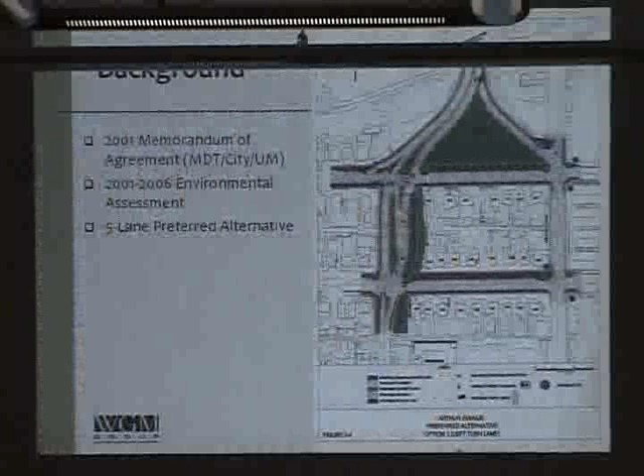There was an environmental assessment—the 5th, 6th, and Arthur EA—prepared over a period of 5 or 6 years. A 5-lane alternative was identified as the preferred alternative. It looked something like this. This is a graphic from one of those documents, and you can see there was a real emphasis on widening Arthur.

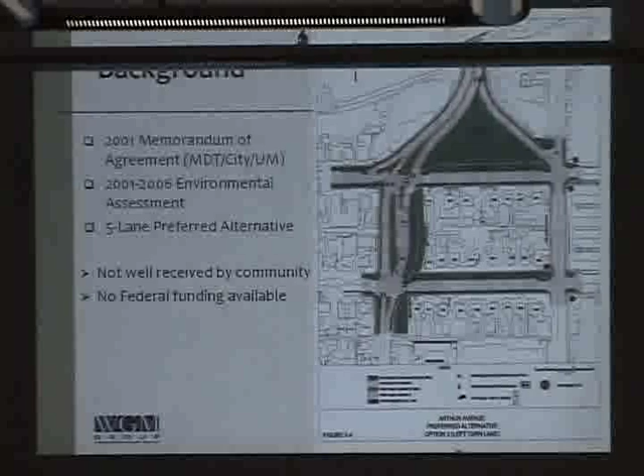This project, as it was proposed in that EA, didn't have a lot of community support, and there was no federal funding available for it. So ultimately, the no-build decision was arrived at for that project.

However, the need for the project didn't go away just by saying we're not going to build this one. The need continued to persist. The university felt it probably most keenly because it's right here at one of their primary entrances. And they approached the city as well as WGM Group and said, is there something we can do in the interim—not this full project that doesn't have support and can't be funded—something else that would address the safety concerns, maybe without totally addressing the traffic analysis, the traffic volumes of a 20-year projection, which is what the previous project tried to do.

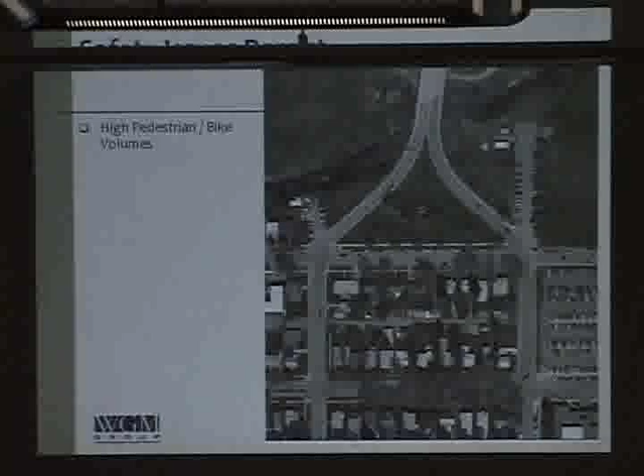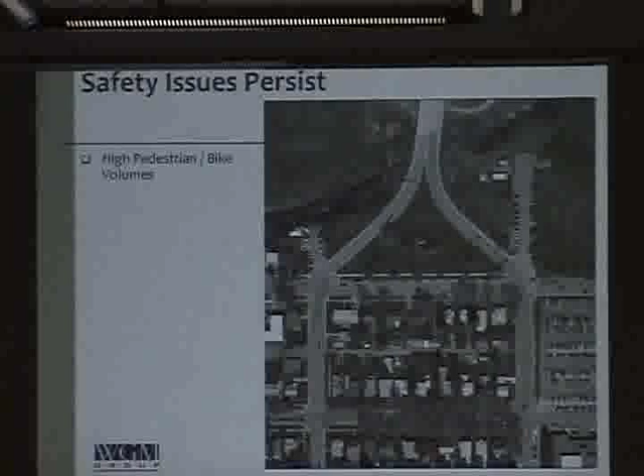Some of those issues that we needed to address included high pedestrian and bicycle volumes. There's probably more mixed modes of use at this intersection than there is anywhere else in the city of Missoula. Not at this intersection, but within these 4 intersections, this project area, than anywhere else in the city of Missoula, possibly anywhere else in the state of Montana, between cars, buses, trucks, bicycles, and pedestrians, and the volumes of each.

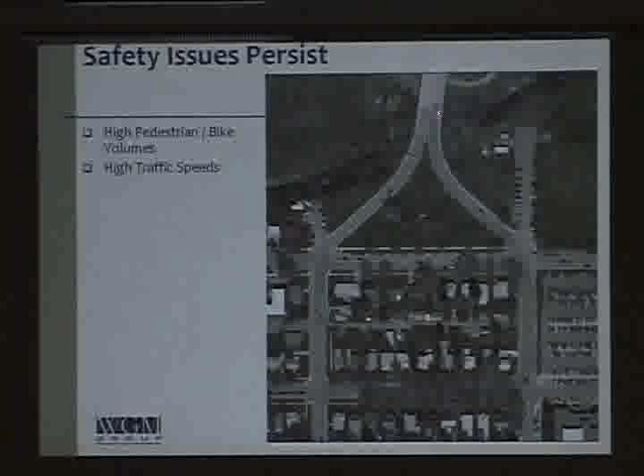Also, high traffic speeds were a concern, primarily coming down this leg of Madison. Poor levels of service at some movements at some of the intersections, primarily over at 5th and Maurice. It's a classic intersection problem. There was also a lot of crashes in the area.

90 crashes were recorded in the project area during the time frame that I did a crash analysis of, which was from July of 2002 through the end of 2008. There were 90 recorded crashes, ranging from minor fender benders to one actual pedestrian fatality that occurred over in the vicinity of 6th and Maurice.

There were, at the intersection of 5th and Maurice, 26 crashes that included 12 vehicles that were struck after leaving the westbound stop sign. So as you know, if you drive this in the afternoon, there's a lot of delay at this intersection, and folks, when they finally got their opportunity at the stop sign, are accepting gaps that maybe are a little bit less than they ought to be, being a little too aggressive, resulting in crashes of westbound vehicles being struck by northbound Maurice Avenue traffic.

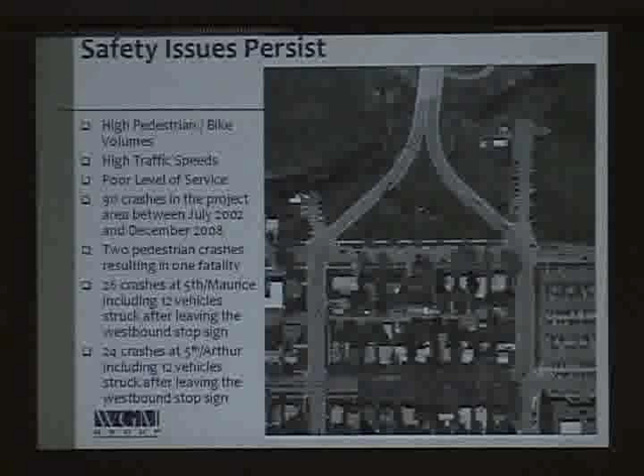And then also 24 crashes over here at 5th and Arthur. Again, 12 of those being vehicles that left the stop sign, entered the intersection, and then were struck by traffic coming down Madison off of the bridge. So these were some of the safety issues, and then just the sheer volume of Highway 12 traffic passing immediately adjacent to the university campus was also something of a concern to the university.

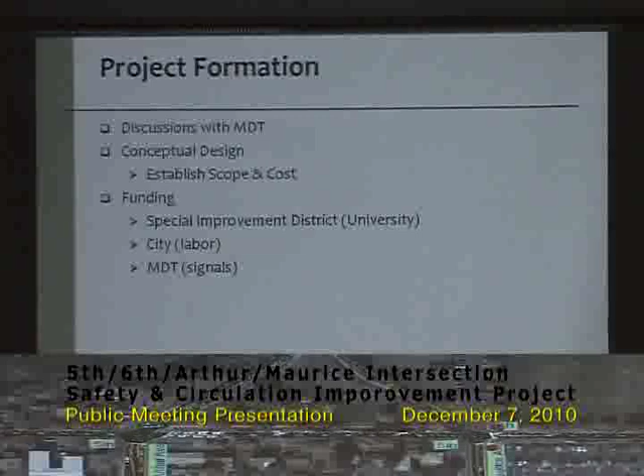The current project started, as I mentioned, with the university wanting to see something still done. We had discussions with MDT. MDT owns the right-of-way of Highway 12. US Highway 12 is a federal route and it goes right through this study area.

So MDT is a key partner in this. They have been involved since the beginning, first with the 5th, 6th Arthur project, and now with this current project. We put together a conceptual design, provided that to MDT, got feedback. We're in the process of responding to that feedback. And Greg mentioned earlier on, the funding for the construction is primarily going to be through an SID on the university, as well as the city providing labor for some of the construction where they have that expertise available, and MDT is going to be contributing a significant amount of the equipment for the traffic signals.

The project purpose, simply stated, is to address basic safety issues associated with a high volume of pedestrians, bikes, and motor vehicles entering the University of Montana campus and passing through on US Highway 12.

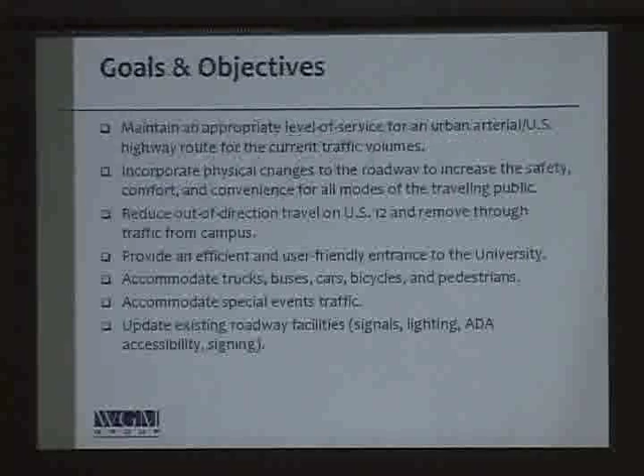The goals and objectives, I'll just move through these quickly. I'm not going to read all of them. A couple of the key ones, however, are to maintain an appropriate level of service for an urban arterial highway route for the current traffic volumes. And that word current is key here. I want to emphasize again, this is not a capacity improvement project. This is to address safety concerns, bicycle and pedestrian connectivity concerns, but not 20-year traffic volume forecasts.

So when we did our traffic analysis, we looked at current traffic volumes. We're going to incorporate physical changes to the roadway to increase the safety, comfort, and convenience of all modes of the traveling public. When we say all modes, we're focusing there on bicycles and pedestrians.

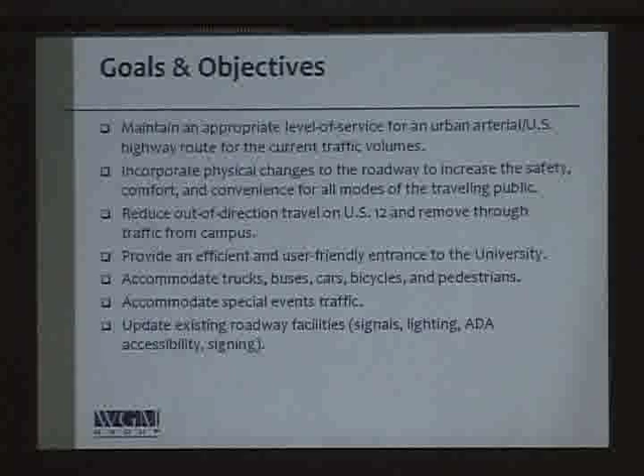As well as automobiles, but automobiles are already pretty well accommodated out here. The goal is to reduce out-of-direction travel on US 12 and remove through traffic from the campus. Because you have to go around on 6th and then up Maurice to get onto Madison and cross the bridge, you're driving further out of your way, producing more emissions, using more gas and more time. With the improvements being proposed here, all of those things can be reduced. I'll leave the other items for you to read, or you can look them up on the website if you want to study them.

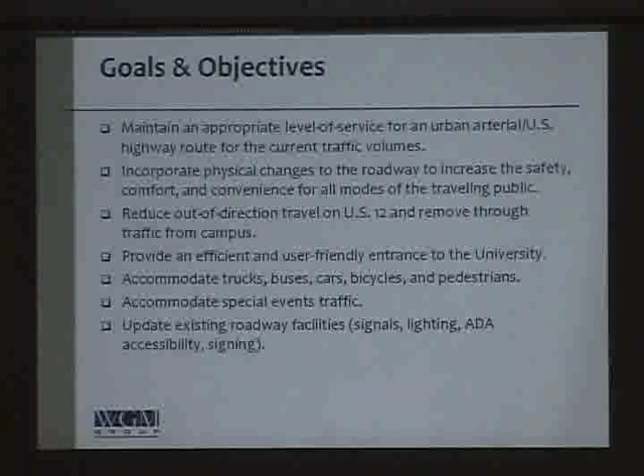So we did a preliminary traffic analysis. This was to satisfy the city that what we're looking at won't result in a lot of congestion, and to satisfy MDT that what we're proposing is acceptable on a US highway route. Let's not forget, this is US Highway 12 — I'm going to keep saying that because it's not an insignificant factor in everything we do here.

In the analysis, we did traffic counts back in the spring when the university was in session, did manual traffic counts at each of the intersections, and analyzed those. Part of what you saw earlier while waiting for the presentation to begin, the simulation on the screen, was part of that analysis. For those interested, once the presentation and Q&A are done, we'll put that simulation back up, and if you have questions about it, just seek me out and I'll be happy to talk to you about those.

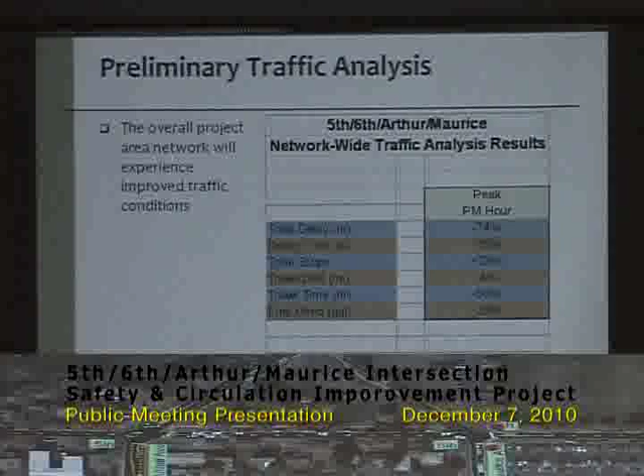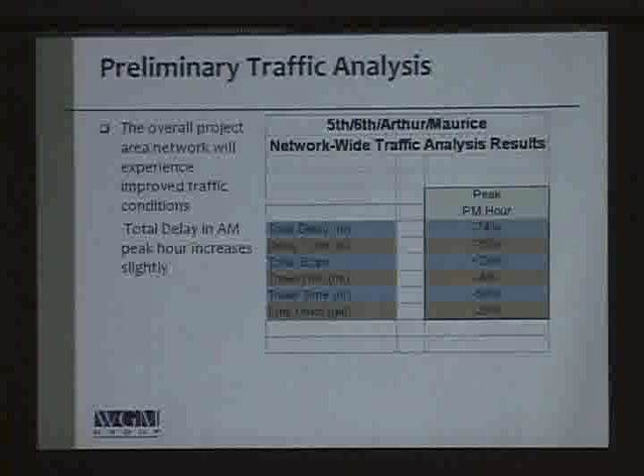We did some capacity analysis, a network-wide measure of effectiveness evaluation, and found that the overall project area network will experience improved traffic conditions. Total delay in the AM peak hour actually increases slightly because of the new traffic signal and reconfiguration, but total delay in the PM peak hour decreases substantially. You can see the numbers on the right-hand side — total delay and delay per vehicle reductions in the neighborhood of 75%, and fuel consumption reduction in the neighborhood of 30%. So while there's some inconvenience introduced in the AM peak hour, it's far more than offset by the improvements realized in the PM peak hour.

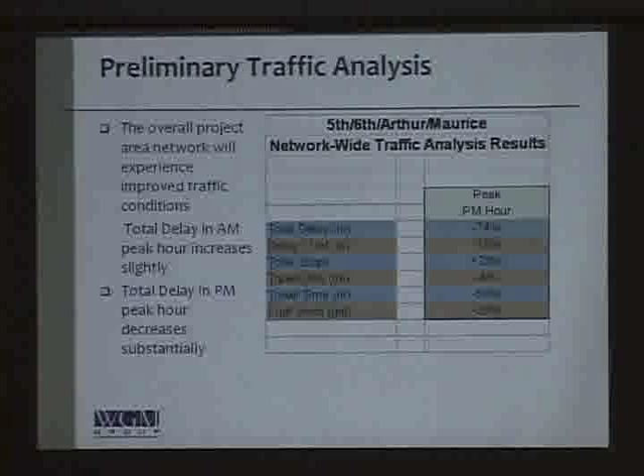So enough about the traffic analysis. Let's talk about what you came here to find out tonight, and that is just what is being proposed.

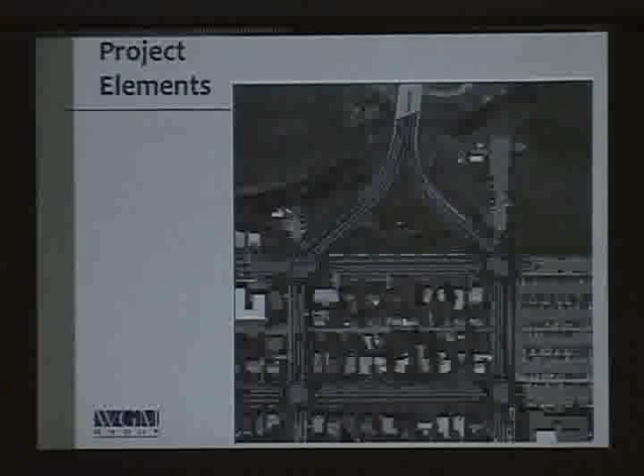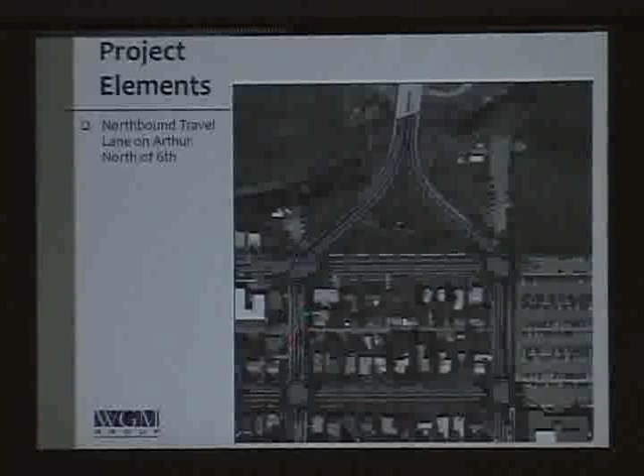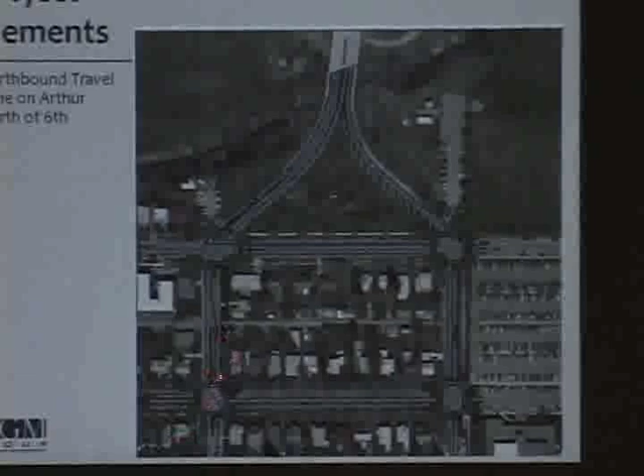The biggest difference, which Greg touched on earlier, the key thing we're doing that allows us to make improvements at other locations within the project area, is adding a northbound travel lane on Arthur Avenue. Currently if you come up Arthur to 6th Street, your only option is to turn right. We're going to add a through lane northbound on Arthur, working primarily within the existing curbs — one of the key differences between this project and the earlier one is that we're trying, to the greatest extent possible, to work on the existing pavement. On Arthur Avenue we're able to do that, with the exception of a quarter of a block right here, the east side, the south half of the block. Because of truck turning through here, we needed to widen a bit to provide a truck turning apron, which we'll see in more detail later.

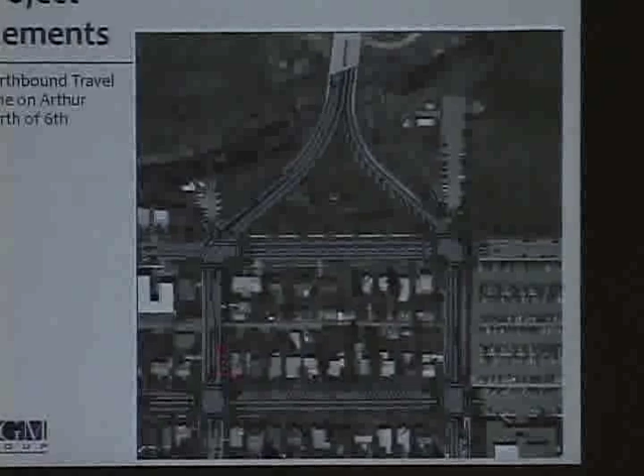Once you head north up Arthur and reach 6th Street, you can continue on what is a new lane, new asphalt, and widening — just to be clear about that — along this side of Jeanette Rankin Park. So we still have the two lanes southbound coming down, and now one added northbound lane in addition. That's the primary, biggest difference you're going to see out here.

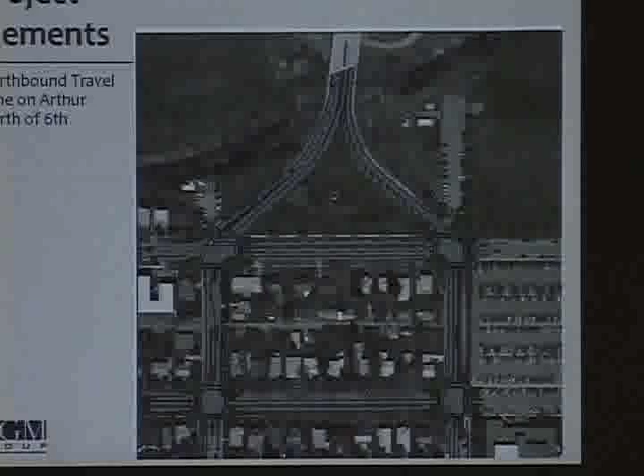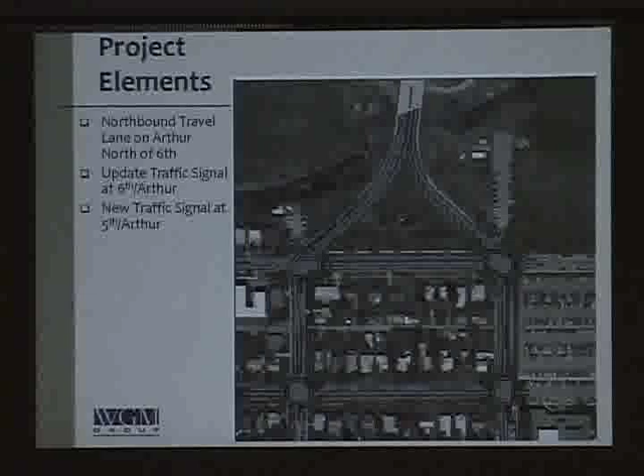We're going to update the traffic signal at 6th and Arthur with new vehicle detection and pedestrian detection, and put in a new traffic signal at 5th and Arthur. There will be intersection improvements at all 4 intersections, improved bike routing and sidewalk improvements, and finally updated pavement markings and signs throughout the project area.

I'm going to go through each of the 4 intersections here, trying to move through those as quickly as we can. We're going to talk about existing conditions and then what we're proposing to change.

Let me go back one. I'm going to go through these intersections in this order just to orient everyone. North is up on this figure. We're going to start here at 6th and Arthur, go to 5th and Arthur, then talk about this area up in here a little bit. Then we're going to come down to 6th and Maurice, and then finally talk about 5th and Maurice.

So at 6th and Arthur, the existing conditions that we felt really needed to be addressed, either because we were aware of them or because folks from the public we've already talked to brought them to our attention as key considerations, included long pedestrian crossing distances across the intersection.

There's no crosswalk, and in fact the prohibition of pedestrian crossings here, because of the way this signal currently operates there's always traffic heading in this direction, whether from the left, the right, or this through movement, so there's never an opportunity for pedestrians to cross here. That will change. The bike lane northbound on Arthur currently ends at this intersection.

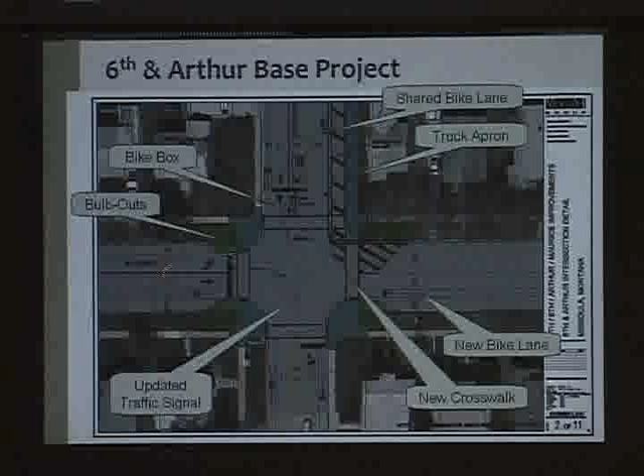There's a truck apron here on this side. We talked a little bit earlier about that widening in here so that this left turn can be made by larger vehicles.

And there's a single lane entry with the option for 2 lanes during events. One thing we have to bear in mind is that there's a lot of traffic entering the university, whether for sporting events, concerts, etc., and there are times when the university wants the flexibility to allow 2 lanes of traffic entering. During those times, part of the reason this is striped rather than a concrete bulb out is to allow through traffic from this lane. This parking would be removed during that period, signed in advance, and you would have 2 through lanes of traffic moving eastbound on 6th Street on occasion.

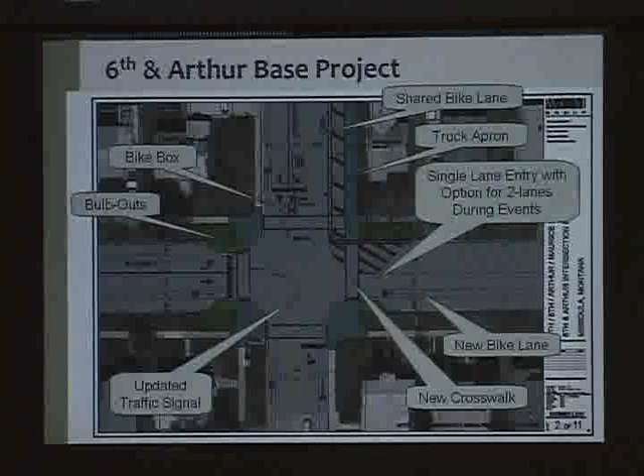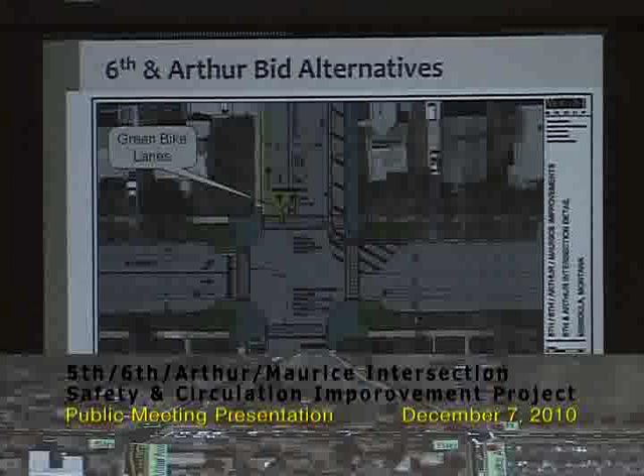So that's what we're going to do with this project. If budget allows, when the bids are received and if there's enough money left over, a couple of things that we'd like to add would be some green pavement markings, presuming that the city and the state can agree that that's something that they're willing to see out there and maintain. That would be an advantage, particularly in the bike box, would help it to really stand out.

As well as special crosswalk treatments. Those might be stamped colored asphalt, or they might be concrete crosswalks, depending on kind of where the preference lies. The intersection of 5th and Arthur, again with the existing conditions.

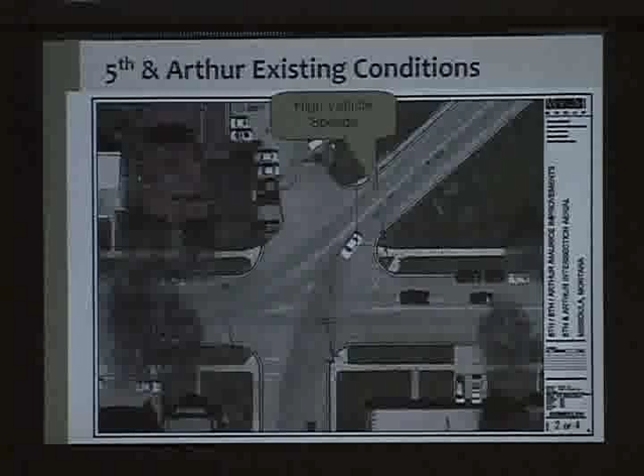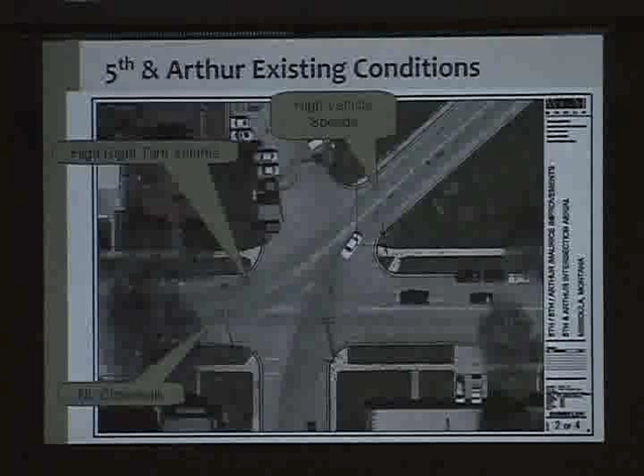Things we were made aware of were the high vehicle speeds coming down Madison. The high right turn volume, which is that Highway 12 traffic volume, and the fact that there's no crosswalk there. There's no crosswalk because it's simply not safe for pedestrians to cross there with the high volume of traffic coming down off of Madison, at least during peak times of the day. There's also no crosswalk on the north leg. Events traffic exiting the University of Montana is something we also need to continue to bear in mind.

So what are we proposing? A new traffic signal. Because this traffic here coming northbound on Arthur didn't used to be there, and all the other traffic that always has been there will continue to be there, this cannot continue to operate as a stop sign. It needs to have some higher form of traffic control, and what we're proposing there is a traffic signal. New crosswalk. We're going to have crosswalks across all approaches, again, at this intersection. Bulb outs at the corners, as we talked about before. A two-stage pedestrian crossing with a raised island. This warrants just a little bit of extra time to explain.

When we initially sat down and prepared designs for this intersection, it included a crosswalk across the west leg of the intersection. The right turn lane was in here tied up against the through lane. The corner was more squared off, and there was a crosswalk here. We submitted that proposed design to the Montana Department of Transportation. They gave it some thorough consideration and realized that with the very high volume of right turns coming down here, they're going to be turning right on a green ball at the same time that pedestrians are trying to cross here. And just the sheer volume of that vehicle traffic brought concerns to the Highway Department.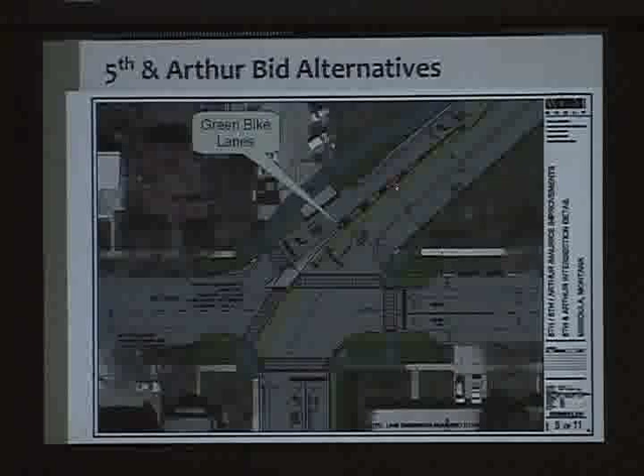And a new bike lane westbound on 5th Street. What will we add if we have some extra money? Well, we'll add some more green pavement markings through here and through the intersection, and the crosswalk treatments as well.

Madison, north of 5th Street, south of the bridge. There's a sight obstruction over here. It's primarily brush and growth, but there's also a guardrail in there. We're going to take a look at what can be done to improve sight distance through this corner. And in particular, with the new traffic signal down here, it becomes even more important that you be able to see down here, see either the signal or the back of queue.

There's a difficult bike lane merge. Bike lane comes down this side, then all of a sudden there's also one on this side, and getting across there is challenging to say the least.

Events traffic exiting the UM, and I keep talking about events traffic, concerts and sporting events, but the university also has a real concern about being able to evacuate the campus in case there was the need to do so. And TJ can maybe talk more to you about that if you're interested. I know he's been involved in putting together that plan, but part of that plan to be able to evacuate the campus quickly, should the need arise, includes having two exiting lanes, both northbound up Madison and westbound on 5th Street.

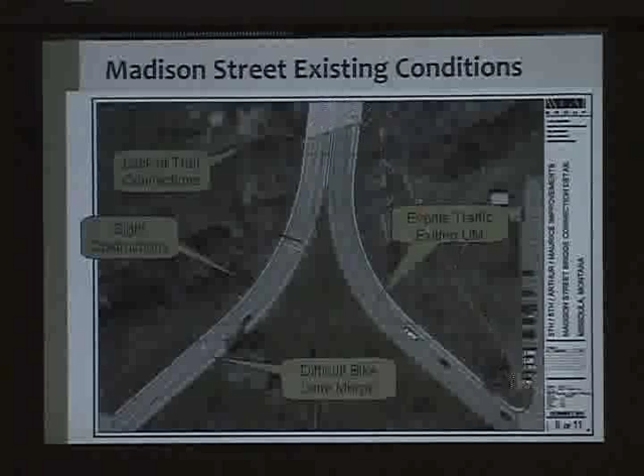So we'll get back to what it looks like here in just a second, but that's part of what we're talking about when we say events traffic exiting the UM. So lack of a trail connection over here. There's a wonderful trail system along the river, an underbridge on Madison Street, and a trail connection you can see comes up this way, but no connection over to this corner of Arthur.

So what are we proposing? Advanced warning signs to make people aware of the traffic signal before they run up on it. Looking at removing the sight obstruction in this location, a bike lane merge with the option of use of the sidewalk. So as the bike lane comes down Madison, when you reach this point, you have two options as the bicyclist. One, you can merge across traffic to join the bike lane, which goes down to the traffic light and is adjacent to the through lane here.

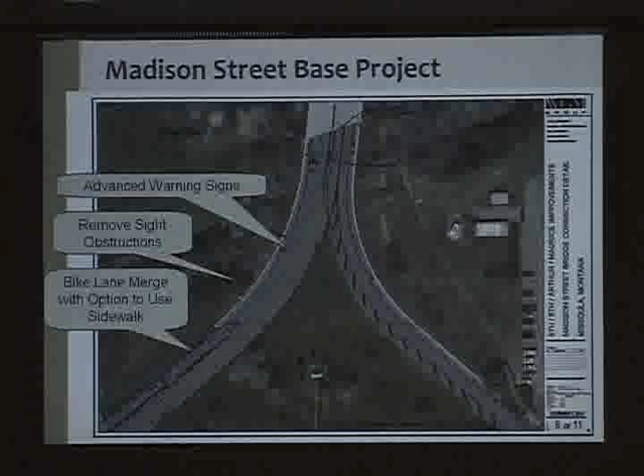If that's not a maneuver you're comfortable with, you also have the option of, we're going to lay down the sidewalk curb here. You can exit onto the sidewalk. Instead of a 5 or 6 foot sidewalk here, this will be 8 to 10 feet in this area, wide enough for a shared use path. And you can exit onto the sidewalk there and come down, cross through the intersection as a pedestrian, and then re-enter the bike lane south of the intersection if weaving across here isn't something you're interested in attempting.

There's also the continuation of the shared bike lane northbound, a single lane exit with option for 2 lanes during events here. So the existing width is maintained, part of it is striped out, part of it becomes a bike lane, and then we have the through lane in the middle. This can then be converted during events to 2 through lanes coming up here and exiting over the bridge with some manual traffic control for this leg.

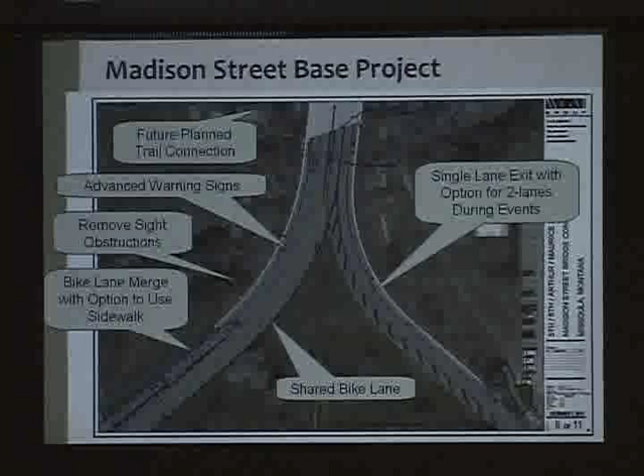And then a future planned trail connection. There's an irrigation channel in here and a very significant change in elevation of grade from this location to this location, which would probably require a long, perhaps fairly meandering path to make ADA grades up there. It's not something that we are able to accommodate construction of in this project and with this project's budget. So that's something for a future project. And then green bike lanes if we have the money to do so.

So what are we proposing? Bulb outs on all 4 corners, as you've seen on most of the other intersections. A new crosswalk on the north leg. A new bike lane here on 6th Street, eastbound, the continuation of the one we saw moments before. A new protected bikeway. If you've been downtown on Higgins since the end of this summer, you've seen where the protected bikeway was constructed down there, separated from the vehicle traffic by the parked cars. Same kind of a concept here.

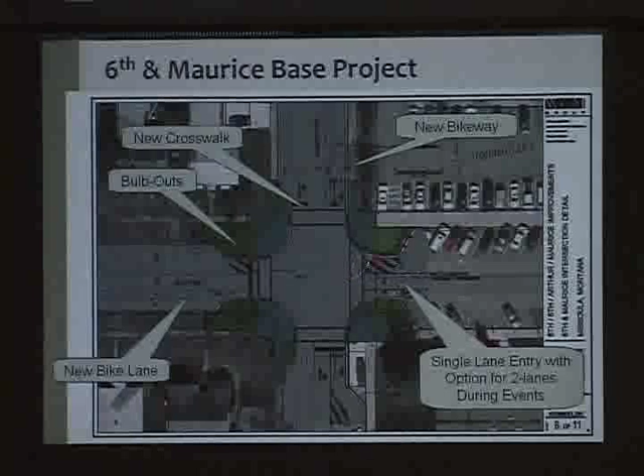In this case, it would be separated by this 3-foot painted median. This would be a 2-lane bikeway with 5 to 5.5 foot lanes in both directions. A single entry into the university where there's 2 lanes currently going in now. There'll be 1, again, striped out to allow 2 during events. And if we have the money to do so later on, green bike lanes and colored or concrete crosswalks.

Finally, the intersection of 5th and Maurice, one of the more complicated intersections really because of all the modes of use that use it and the volumes in each mode. Things that we took into consideration included the high volume of US 12 traffic going northbound, the bicycle and pedestrian vehicle conflicts, particularly crossing the east leg. As you're all, I'm sure, well aware, the bike path from the underbridge comes up here. Pedestrians and bicycles alike make their way to this location.

And because the queue of traffic is so bad, particularly in the PM peak hour right after 5 o'clock, this queue backs up past the stadium at times. By the time you've waited 5 minutes plus to get your turn at the stop sign, oftentimes the drivers are real anxious to get out and don't give due consideration to the fact that while they're looking to their left for a gap in oncoming Highway 12 traffic, there's pedestrians and bicycles waiting to cross in front of them from their right. So a real potential safety problem.

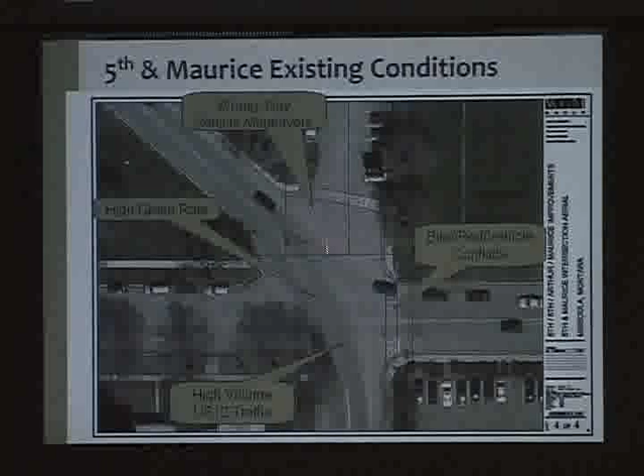High crash rate, as we talked about earlier on. Wrong way vehicle maneuvers coming out of the parking lot. This is one-way northbound. No crosswalks and long crossing distance, events traffic. So what are we proposing here? A number of things, starting with bulb outs at the intersections, a new crosswalk on the north leg, a new stop sign. So there'll be all-way stop control at this intersection. So not only will the 5th Street approach stop as it currently does today, but also the Maurice Avenue northbound approach.

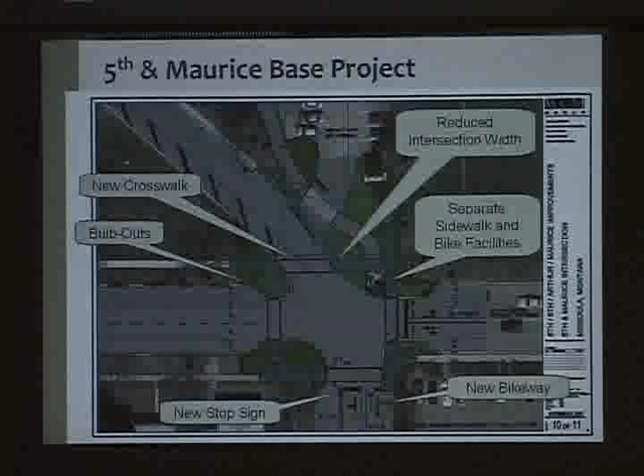New bike lane westbound. What would we add? We would add green pavement markings through here to further define the fact that you have vehicles approaching a stop bar with both pedestrians and bicycles crossing in front of them, as well as the green bike lanes, as well as the colored or patterned concrete crosswalks.

Yes, thank you. Kevin reminds me that one of the things that we're doing here, in addition to everything we've already discussed, is now that there's not the volume of traffic, there's no longer the need for two northbound lanes on Maurice, and so it's going to be converted to a two-way street. So there'll be both northbound and southbound traffic on Maurice Street. So the cross-section is essentially parallel parking, a southbound lane, a northbound lane, and the protected bikeway.

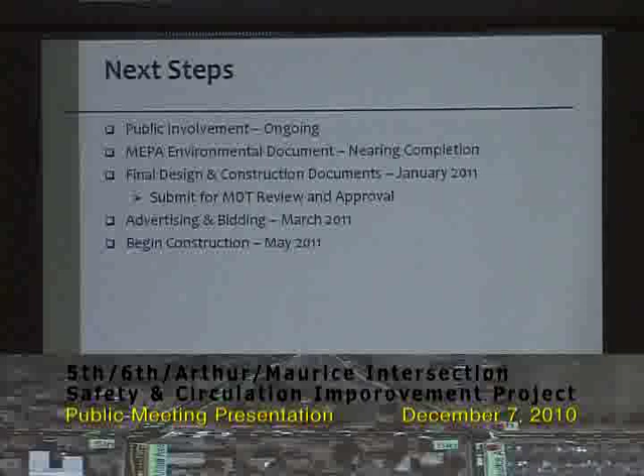So the next steps. Public involvement, which is ongoing, part of what we're doing here tonight. We're going to continue to hear comments from folks and encourage you to continue to provide input. We try to incorporate as much as we can. There are always budgetary restrictions and also just practical engineering facts that we have to deal with. The MEPA environmental document is nearing completion. That is a categorical exclusion. That'll be completed soon and signed.

Oops, sorry. The final design and construction documents, we hope to have those ready to submit to MDT. MDT is a key partner in this. I've mentioned them a couple of times. They're going to be reviewing this because, again, it is their facility, US Highway 12, for the most part through this project area. We will be submitting plans to them for review in early January with the hope that we will be in position to bid the project in March, begin construction at the end of the spring term, and if all goes well, have it substantially complete before the beginning of the fall term.

So, with that said, I'm going to encourage some questions. I don't imagine I'll have to encourage very hard. I'm going to ask the city and the university to go ahead and help me field these. Yes, sir. Can you show us how you picture the traffic merging, the north traffic on the bridge? I could. I don't know how long it's going to take me to get back there, but we're going to do it.

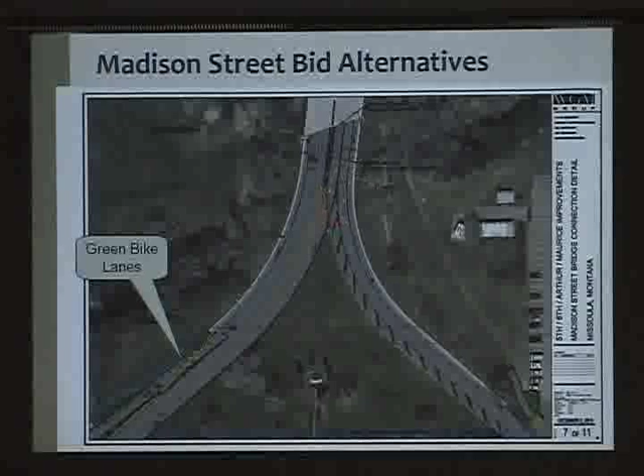I saw something else here and it slipped my mind, something important I wanted to tell you. Hopefully it'll come back. Oh, it has to do with why a shared bike lane rather than a dedicated bike lane northbound coming up Madison. The reason is right here. We didn't feel comfortable with a dedicated 5 or 6 foot bike lane here, reaching this merge point, with those bikes finding themselves between two high volume, potentially fast moving lanes of traffic, with the bicycle in the middle. We really felt we didn't want to encourage use of that lane by novice riders. That's part of the reason we put the Sharrow in. More expert bike riders can be in the lane and take the lane once they get to the merge point, rather than coming up and being between two lanes.

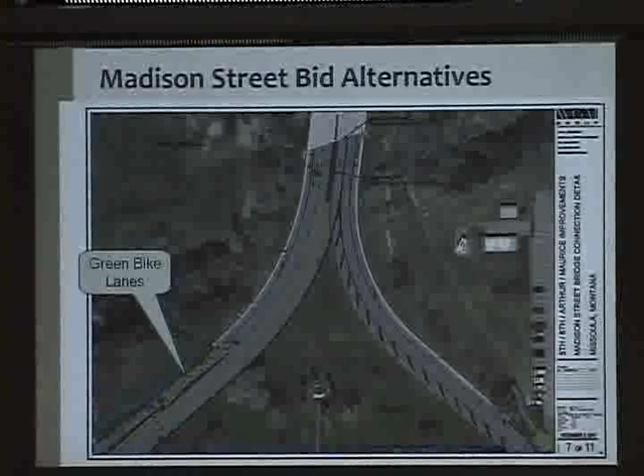So next question, Phil. Actually, two real quick questions, Mark. One on the protected bike lane at the north end of it. How do bikes that have come from the north get into that protected bike lane? I couldn't quite tell from the diagram exactly what the access is to get into the southbound protected bike lane.

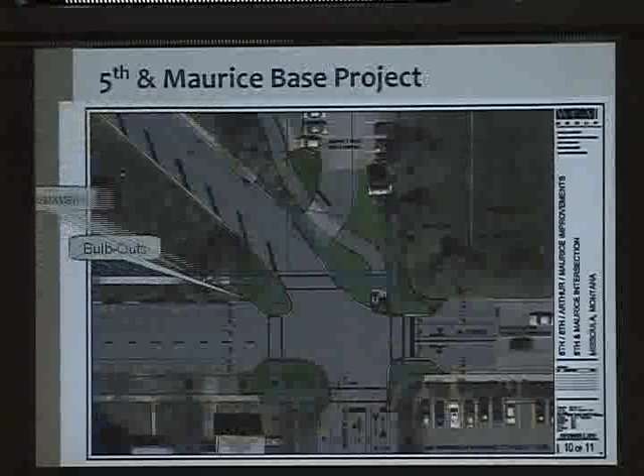So he's got a two-part question. His first question was, bicycles arriving from the north at this location, how do they get into the bike lane, the protected bikeway south of the intersection? That's his first question. So here's the location we're talking about.

When you come up the bike path, you'll come up to this location, hopefully yield to the pedestrians crossing in front of you, come to this location. I mentioned earlier there's 2 stop signs here, might actually be 3, and you would enter the intersection here and cross. While this traffic is stopped, you would essentially be the 3rd leg of the intersection.

So that protected bike lane or equivalent facility carries on across the intersection. Correct. Okay, and then my other question, the new bike lane eastbound on 6th, where does it begin? Second question is the new bike lane eastbound on 6th, where does it begin?

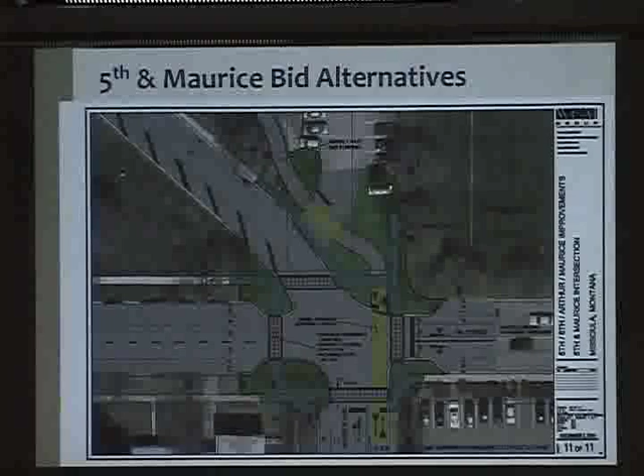He's talking about this bike lane here. It continues into the intersection, and then it's up to the university to decide what they're going to do with it on this side. Where does it begin? It begins on the west side of Arthur. So when we redo striping there, it will develop it there, but it doesn't continue, at least not on this project, any farther than the immediate vicinity of the intersection.

Another thing that bears pointing out is this protected bikeway. When it comes down through the intersection, it comes down here and it currently ends by running into the angled parking out in front of, I believe it's the law building. The university is having internal discussions as to what they're going to do here to get rid of that issue and provide a more logical terminus to that.

Yes, sir. You call it a protected bike lane, but it's only being protected by a 3-foot piece of, there's nothing there, no barrier, right? There's no barrier. His question was, the protected bikeway, what's protecting it? I mentioned a 3-foot painted median, and that is correct. There is no raised curb at that location. There is no line of parked cars as there is downtown. But that method of protection defines where the bike space is intended to be, and it is a method that is used in other cities.

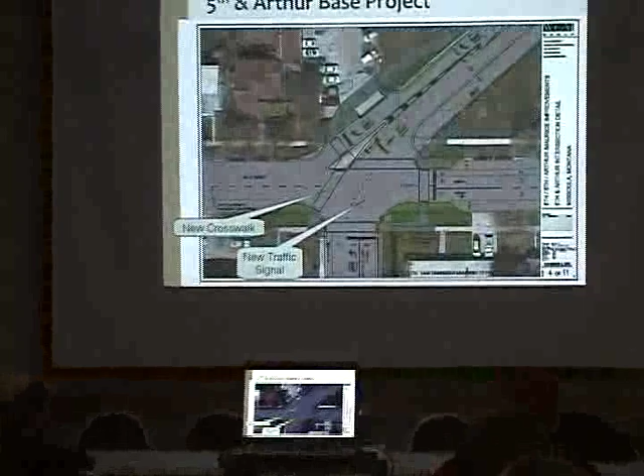What do you mean by the university property? The property on the 600 block of 6th Street? Can we get to the graphic, Mark? The overview, yeah. Because the area, the SID is really... that's a very good question. The key is that there's no public assessments, no property owner assessments for adjacent properties. The university, the state of Montana, has budgeted this over 20 years to pay their SID off.

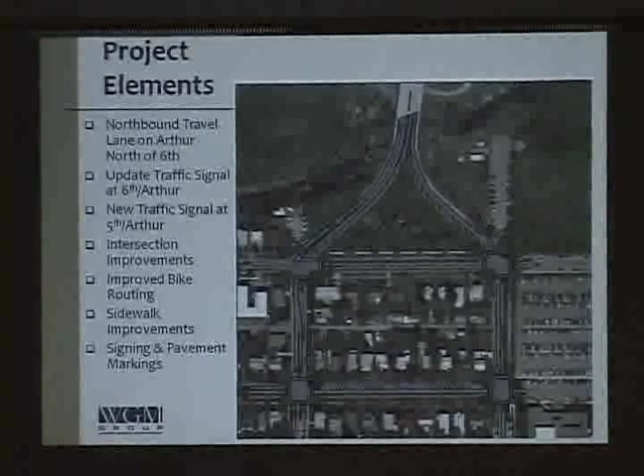We took in that, and the parking lot, and the adjacent block of properties here to the south, adjacent properties basically on this side. I don't know, were these taken in? Yes. So that SID was an action by the city in collaboration with the university through the spring and summer of this year. So if you've got any questions about the SID creation, the boundaries, or how that came about, that's all a public record through the city council.

Other questions? That also means part of the reason why we've limited the scope of this project, and the scope does not go outside those boundaries, is because if we took construction outside those boundaries, by SID law we would have had to include the properties adjacent to any improvements in the SID. So the boundaries of the SID limit the scope of the project, so we don't impact the citizens of Missoula outside of the university area.

Yes, sir. So, there's a large emphasis on US Highway 12 and the traffic it brings through here, and the rules about why we can't do things certain ways, but I don't hear any federal money for this. Is there federal money? We're shortening their highway, making the travel distance from coast to coast shorter. The question is, is there any federal money? There is no federal money in this project. There is some state money, there is city money, but there is not federal money in this project. And that was by design.

Yes, ma'am. When I come off the bridge headed south, because of the steep incline, I have trouble staying under the speed limit without hitting the brake or gearing down, and then you're going to put a traffic signal there. The question was about vehicle speeds coming across the bridge and into the study area, and then arriving at a traffic signal. What we will do is, as I mentioned before, put up signs in advance. This is primarily repeat drivers through here, so it shouldn't come as too much of a surprise that there's a traffic signal at this location. And you are, after all, on a U.S. highway route, but you're in the middle of downtown Missoula, so speeds shouldn't practically be as high as they probably are.

Well, that's true. And then what about traffic backup in the meantime while you're waiting at that signal? She asked about traffic backup at this signal. There will, of course, as with all traffic signals, be some queuing. We can look a little later at the traffic simulation and model. We don't expect there to be great extensive queuing. An interesting thing that happens today - we talked about the PM queue here - the AM queue, because of all the pedestrians crossing on this approach, there are periods in the AM peak hour where traffic wishing to enter the university stops to allow pedestrian traffic and backs up to the point where it interferes with the operations of this intersection. Those interfered operations begin to back up this way, so there's already queues of traffic out here. We're not just shifting them around, we're actually reducing the amount of queue overall in the study area.

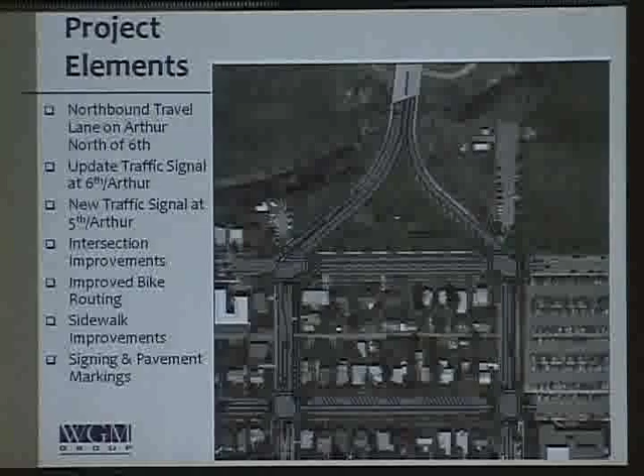Many hands. Yes, sir. Much of what we're dealing with today is the legacy of something that happened 100 years ago when the Milwaukee Railroad came through here. The reason the Madison Street Bridge is so high is because we had to get over the trains. I see the bike facilities that will allow me to go up over that bridge.

I had a birthday recently, and I'm going to have more, but I'm not going to ride my bike on that. But it leads me to ask the question, that bridge has got to be at least 50 years old. What's its life expectancy, and when might we anticipate it being replaced? Is there anything we're doing today in this design that is anticipating that bridge's replacement?

Does that affect what we're going to do today so that we don't have to do this over? I'm still hoping that on someone's desk is the plan to make that connection you said would be too hard, along the toe of the slope down to the riverfront trail system and the underbridge, which I think is a lot more convenient and appropriate for bicycles.

Try and summarize the question. It has to do with the fact that the bridge grades are as steep as they are because the bridge was constructed to allow the railroad to pass underneath. The railroad no longer passes underneath. Is there anything we're doing now that would prohibit that grade when that 50-year-old bridge needs to be replaced? And I'm sorry, I have no idea when that date is going to be.

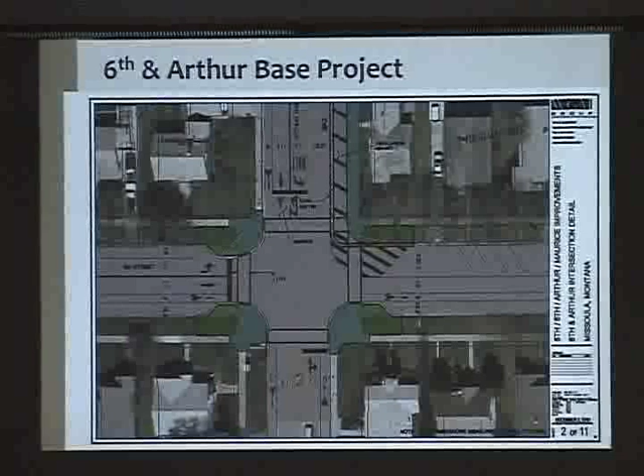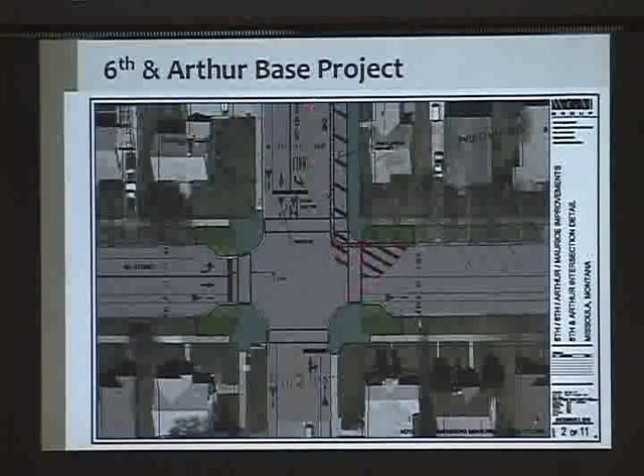The second part of the question has to do with the university's potential plans for a biomass facility, and how the trucks would come in. It's actually a really good question, because part of what we had to take into account is truck turning. Part of the reason this is striped the way it is, rather than a big bulb-out, is to make sure we can get large trucks to make this left turn around this corner. So it's my understanding that those trucks will primarily be coming to and from the Broadway direction.

So they'll be coming down Arthur, making the left, going straight into the university through Maurice, and then when they exit, coming out 5th and making the right and going up over to Madison Street Bridge.

What about folks coming in, the trucks coming in from the Bitterroot? They will be coming in presumably on Brooks Street and then coming up 6th Street and coming straight in here. And again, this project at the very least can accommodate them easily. We're not here necessarily to talk about the greater Missoula area and truck turning, but here it'll be fine.

Yes, sir, I have a question about the southbound direction on Maurice. It seems like the only people that could possibly be coming southbound would be people coming out of the university on 5th that would be making a left at that intersection, and it would just take them back into the university. So do you think there will be much demand for the southbound lane there?

The question was the added southbound lane on Maurice. I don't know if I can get there fast enough — I can answer the question faster than I can get to the slide. I said earlier there's no longer the need for 2 lanes northbound on Maurice, and so we're going to change it into a 2-way street.

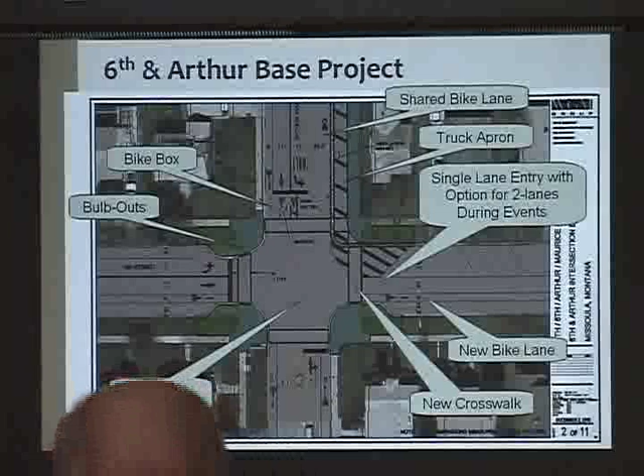The question was, how much demand do you really anticipate for that southbound direction of traffic? The point being that once you got there, you're kind of coming from the university and maybe just looping back too. And the fact is, we don't anticipate a lot of demand at all. But in the interest of creating a network, giving options, giving that person who came out of the parking lot and is looking for a space a way to get back in, and allowing facilities to get back down into that portion of the campus without having to go out onto Arthur, it's an opportunity, but we don't really foresee a lot of traffic volume on that.

Yes, sir, in the white sweater back there. It was discussed when we first had our meeting with the 5-lane Reserve East, how many years ago? And it's been discussed since then. But I just want to get the official view here. Why no roundabouts? This has been talked about as having a roundabout at the locations on Arthur Avenue, at the very least, on and off for a long time, so why are we not doing roundabouts?

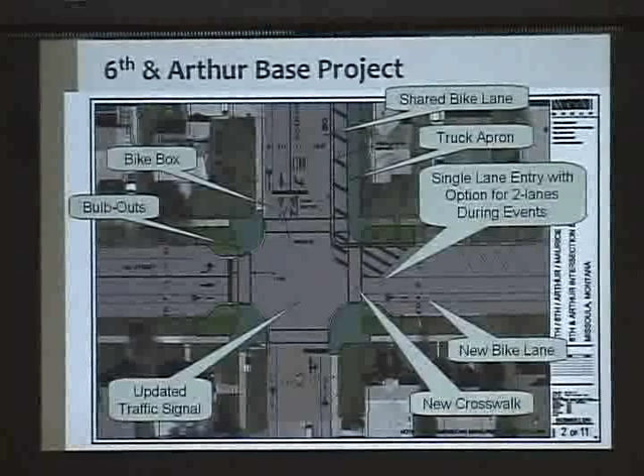Yeah, exactly. Roundabouts have been talked about for a long time at these intersections. It's something that has been studied by a number of different engineers, including us. We think, while they have merit, this particular project is limited on funding and limited on the amount of right-of-way that we have to work with, so roundabouts weren't an option that we could consider. We did look at them, but because these intersections are fairly constrained, it's a more cost-effective option to go with signals.

Long-term, could a roundabout work in some of these intersections? Maybe. Some of the challenges with roundabouts is most of the studies that have been done have said it would have to be more than a single-lane roundabout. So you're talking about multi-lane roundabouts, which are more challenging for pedestrians and bikes to use, and obviously require more right-of-way. They're also more difficult to deal with for events traffic. When you have a high flow of traffic coming all in one direction, roundabouts tend to be more difficult to accommodate that, requiring more police traffic control during those events. But long-term, maybe that's something we would see in the future. Right now, for the project we have at hand, we aren't looking at roundabouts.

Thanks, Jeremy. Yes, ma'am. So I have a concern about the 6th and Maurice intersection. That being, without a stopping mechanism from 6th, how do you ensure the safety of pedestrians crossing on the north side of Maurice?

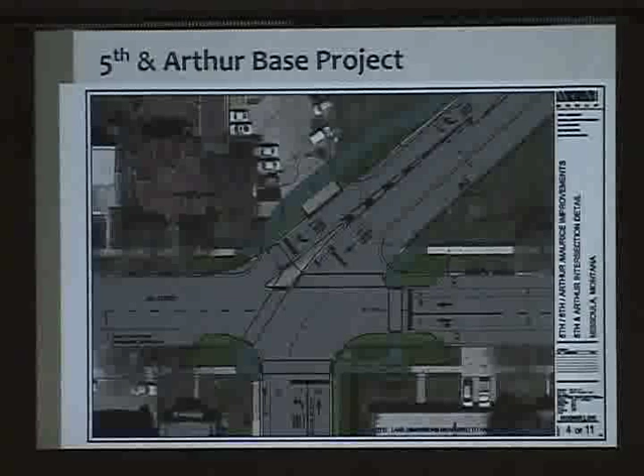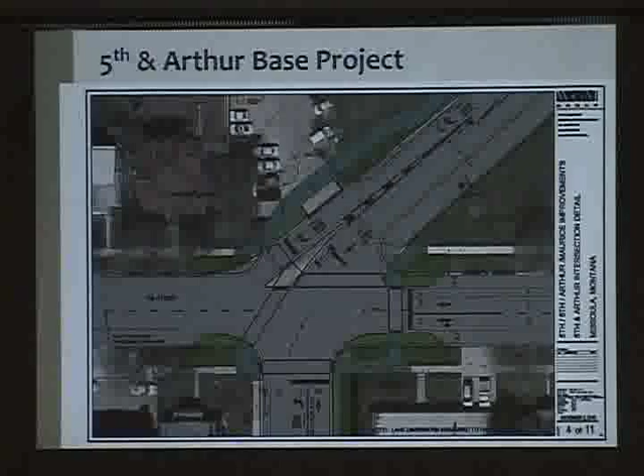Has there been any studies to see whether or not people might turn on Connell, for instance, go down Connell all the way down to the theater, take a left on Maurice, continue on up past the Law Library, up to the intersection, and go up the ramp? They're avoiding 2 traffic lights, for instance. The question has to do with kind of the law of unintended consequences. If we make this change, are we going to induce traffic to take other routes?

The answer is, I can't say for sure. Let me take a step back. I mentioned earlier that network-wide there's going to be significant improvement of operations. What I didn't emphasize was that there'll be some individual intersection movements that won't operate as well as today in order for that whole network to operate better.

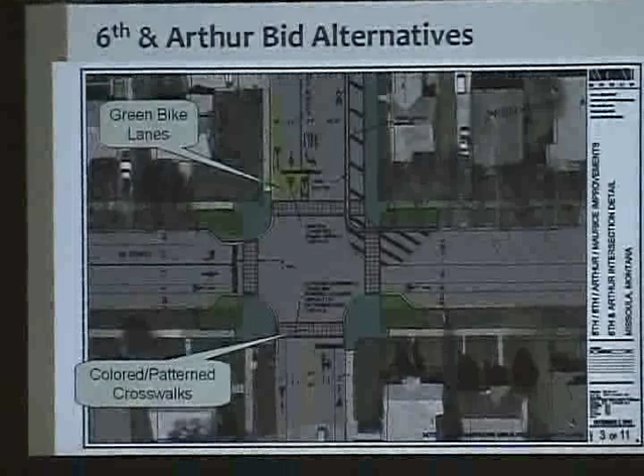And one of those could be this left turn, which is kind of what I was getting at in a question a moment ago about some people maybe not electing to make this left, but to continue around the way that they go now on 6th and on Maurice. So, to try to get to your question, one of the things that we have talked about internally in our conversations with the city is the potential that some people may elect to take Higgins up to Broadway rather than going across 6th Street and taking Madison up to Broadway.

There is that possibility. The eventuality of them getting off of the network and into the local streets is really beyond the scope of what we were analyzing within the traffic. So you don't know? I don't know. Yes, sir.

Suppose we get this all in place and you get it running for a couple of years and find out it's not working quite the way you'd like. Do you have a contingency plan to maybe go back and make part of those one-lane streets two lanes again, and that sort of thing? Question is, what if it doesn't work as well as we hope in a couple of years? What's the contingency plan?

The thing to bear in mind here, I think, is that, as we tried to emphasize earlier on, this is a safety improvement project, not a capacity improvement project. And so we're not trying to add capacity to the network. At the same time, we're not deliberately going out of our way to make things any worse, and we're doing all that we can to ensure that we can move cars as efficiently as possible. If things were to begin to back up, I don't know. Steve, what's the pat answer for that one?

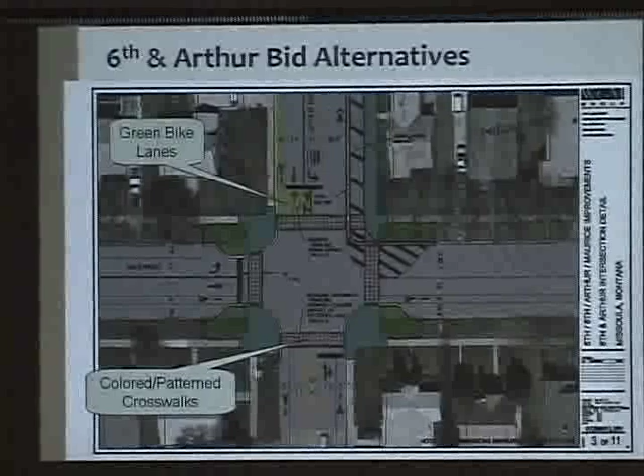Once again, I'm Steve King, City Public Works Director. The complaints will come to my office, so that's the first thing that I'm very aware of. And we've talked about long range. There are really no long range changes planned. As Mark and Greg introduced, there was a more comprehensive project proposed previously that was not supported by the majority, and so that's really off the table.

So what does the future hold? It really is unknown. It depends on traffic flows at the university, how successful ASUM transit is for park and rides. There's a lot of dynamics in the neighborhood, in the university, in the campus, and the future of our fleet and our modes. What are fuel prices going to do? All the other variables in the future. So we don't know that.

We do know that this is vetted through the Department of Transportation, through the university, and through the city, that this works for what it is as far as safety and operation with existing traffic flows. What the future holds is yet to be seen. But from a city perspective, we would continue to monitor safety. And if there were improvements that were obvious or presented themselves, we would monitor that and have the ability to implement changes.

Yeah, and that's exactly right, Steve. We're always able to make tune-ups. We're always able to make some changes that could either change signal cycle times or other features. There's that ability for modification of existing traffic operations. What I think is really key here is we're not reducing capacity of the existing system. In fact, for most of the movements, it's actually improving the operation of this system.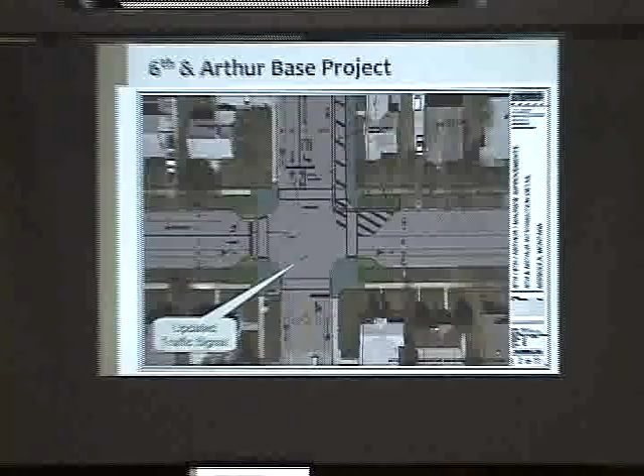Mark, do you have that delay slide? You need to show that slide. It should be down to the right from that. I'm going to go back to a delay slide here in a moment. So let me reiterate the question. The question had to do with the entrance to the university at the intersection of 6th and Maurice Streets, and the fact that we are going to have just 1 lane entering the university, and isn't that a reduction in capacity, because there are currently 2 lanes going into that parking area.

Okay. However, you can only enter those 2 lanes from 1 lane on 6th Street, because in the inside lane you're forced to turn left, and in the outside lane you could go left, through, or right. So you still have 1 lane going in. It's just you only have 1 lane to head into instead of 2. And so within the circulation system of the parking lot, there may be some reduced capacity.

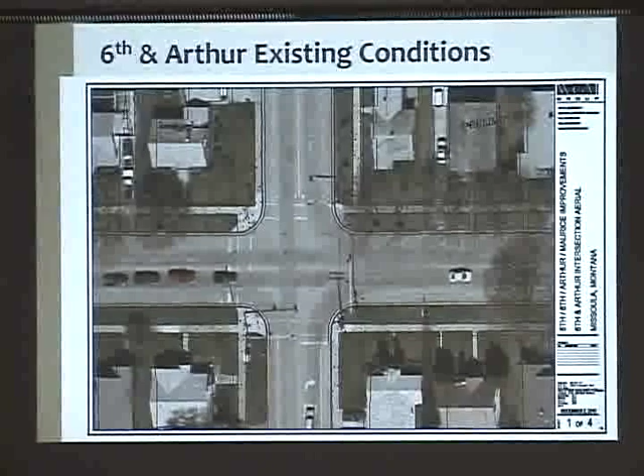That has to do really more with what the university opts to do once you get past the immediate confines of this project. And then, just a second.

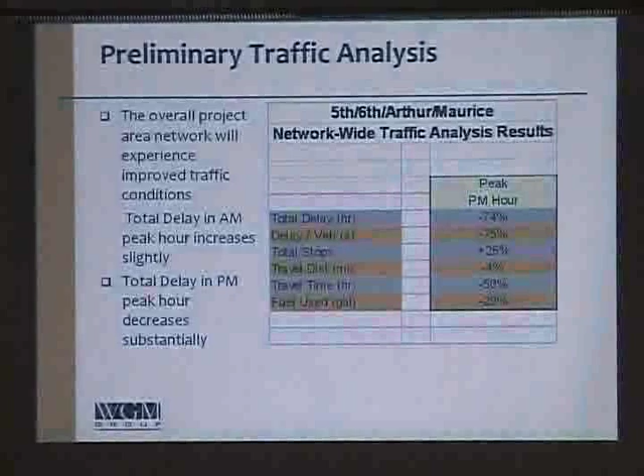And getting back to the delay slide that we looked at earlier, network-wide, this is during the PM peak hour. Again, just want to emphasize, number of stops goes up by 26%. It's because we're introducing a traffic signal. When you introduce traffic signals, you're going to increase the number of stops.

But overall, network-wide, the combination of things that we're doing, we're going to see a reduction in delay during the PM peak hour that the modeling at least forecasts of 75%. Is it truly going to be 75%? No one will know until we implement it, and somebody maybe does a before and after study, but it's going to be significant. Yes, Bob?

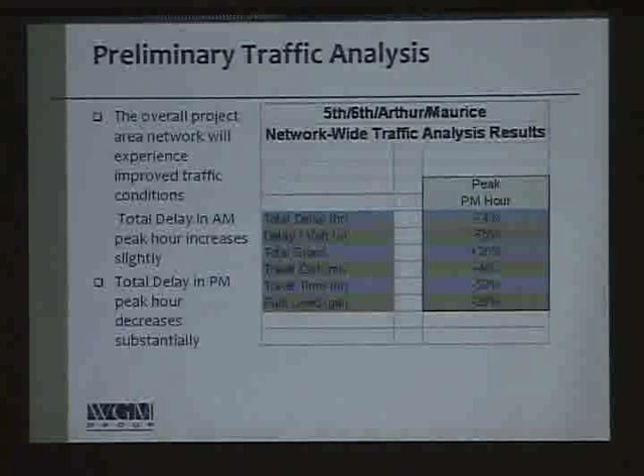I do like a lot of the changes you've shown us tonight. There's a huge concern about the stoplight and the speeds coming down the hill, especially with that bike crossover maneuver, people looking up at the light. So I'm very concerned about bike and motor vehicle safety with the speeds of people coming down that hill. Can you talk about anything you all have tossed around to mitigate that safety? And then when do you want comments into your office by?

Okay, I'll take the second question first. The second question was, when do we want comments to us by? Is there a deadline of some sort? Practically speaking, because we need to have the plans prepared by early January in order to get them submitted to keep on the construction schedule that we're committed to, we need those comments just as soon as you could get them to us, certainly before the holidays at the very latest.

The first part of his question had to do with traffic coming down the hill from the Madison Street Bridge toward the new signal, and the fact that there's that bike lane that crosses in front of that traffic. And might the driver be distracted by watching the signal coming down that hill, at already higher speeds, and what is the safety concern? It's a really great question, Bob, and we have juggled that question several times. We've put it down on paper and even submitted it once to MDT in a different fashion.

And there's no ideal solution because you're going from 2 lanes to a dedicated right turn lane. If, as in many locations on southbound Reserve Street, for example, you have 2 lanes and then you're developing a right turn lane on the outside of that, your bike lane can come right through there. It's a fairly standard configuration. It's not what we're doing here. We have 2 lanes and one becomes a right turn lane, and you have to move the bike traffic through there. So what are the options?

They would have to, I'm sorry, Greg, did you have a response you wanted to offer? I just wanted to make sure. Yeah, one is they have to pay attention to the, at that point, they're controlled by the light. Right, but there's no other way for cyclists to turn right onto 5th unless you're just taking the lane of traffic, which is obviously an option, but using those facilities. Right. Yeah, you wouldn't want a bicyclist to make a right turn from the bike lane.

If they're going to make a right turn onto 5th westbound, they would come down either on the sidewalk or in the traffic lane, and if they're in the traffic lane, wait for a green light, or if they're on the sidewalk, they would have to make their way down off of the curb and onto the street as a pedestrian. I guess my point is, as a cyclist, I can foresee many other cyclists taking the sidewalk and then trying to merge back on. So you might consider that. Thank you.

Yes, sir. I remember at an earlier stage of this project being told that Jeanette Rankin was not actually a park, and so I just wanted some clarification about what it is.

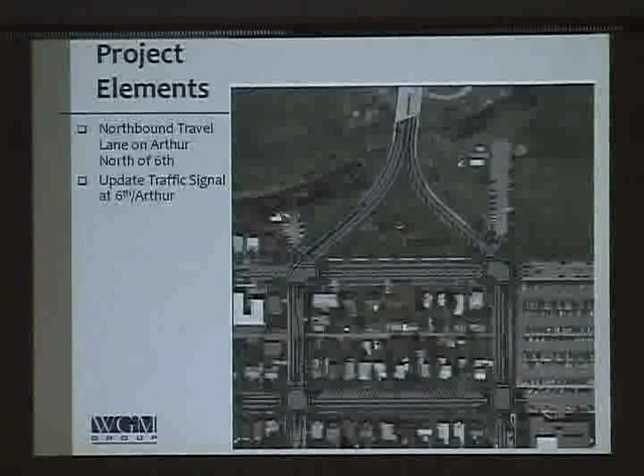I'll try, and if I'm wrong, the city will correct me. It is a wide spot in the MDT Highway 12 right-of-way, officially. So it's not like we're losing parkland dedication at all. That's correct. The question, I'm sorry, let Steve answer it. I'll reiterate it, because he didn't like my answer. The Jeanette Rankin Park, as it's known, is this area in here.

His question, or his comment, was that it's not truly a park, and can we clarify legally what that space is? Mark's answer was correct. It's not dedicated parkland, and that's a legal definition of land use - dedicated park versus other uses of property.

This property is state right-of-way. It's a wide landscape area of the state right-of-way that has traditionally been used for park activities. Ironically, I think with the changes and the crosswalks being built, the park area will be more accessible than it is now. Some of the traffic configuration will allow maybe more public use of the park.

There is going to be less square footage of park. We talked about taking approximately a 15-foot lane out of this portion, but there will be a substantial portion of this right-of-way for park use and public use that will sustain.

Steve, if we ever get to the point where Jeff made the suggestion that we could reduce the bridge and lower it, this whole area is going to be totally reconfigured, and MDT is going to retain that right-of-way use, so they have options of improving this 10, 15 years down the road.

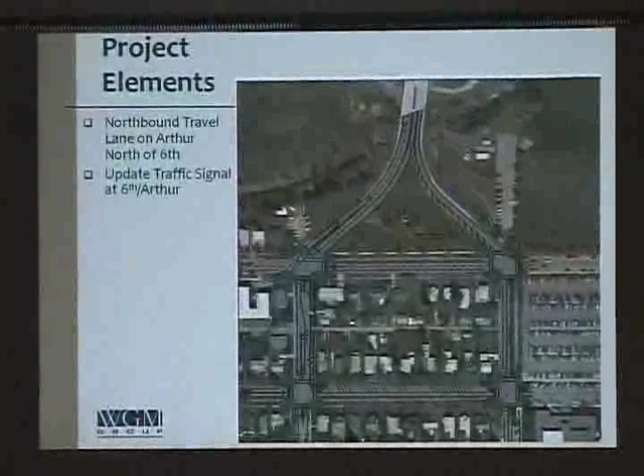And will this plan stop that from ever happening, or does it still lend itself to that? The question is about this section of 5th Street, and for that matter this other section too. There's been some discussion in the past of this becoming two-way, so the entire campus loop is two-way, opening up options for circulation. Did we evaluate whether that should be part of this project, and is anything we're doing now going to preclude that from happening in the future?

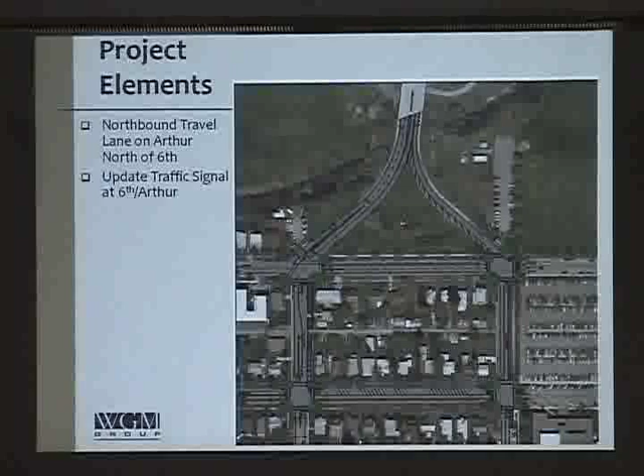Without getting too far afield, the answer is yes, we certainly did consider that. We looked at a lot of options. One option included looking at a roundabout here, which would make it feasible for this left turn to occur. With the angle things are at now, it's difficult to envision making a left turn effectively and efficiently through there, especially for larger vehicles. But a roundabout at that location would make that possible.

We also looked at what it would mean long-term as an entrance to the university for this to come straight in, as an entry statement, and then this would become two-way. Just a lot of ideas were thrown about. But ultimately, it wasn't part of this project to try and create the ability to make a left turn at this location.

Are we doing anything to preclude that in the future? I don't see that we are. We're not changing the existing options. I don't believe we're really doing anything that would prevent that from happening in the future. I think along those lines, one of the important things to remember is we're working with a very small amount of money for a project like this.

This is kind of a bare bones type project to get some safety improvements. The kinds of things that would really make a dramatic change here, you're looking at several orders of magnitude difference.

So this is a $1.7 million project. The project that was proposed earlier with the 5-lane alternative, I think, was $4 to $5 million. So you have to think about what we have to spend here and what the future might hold in terms of funding.

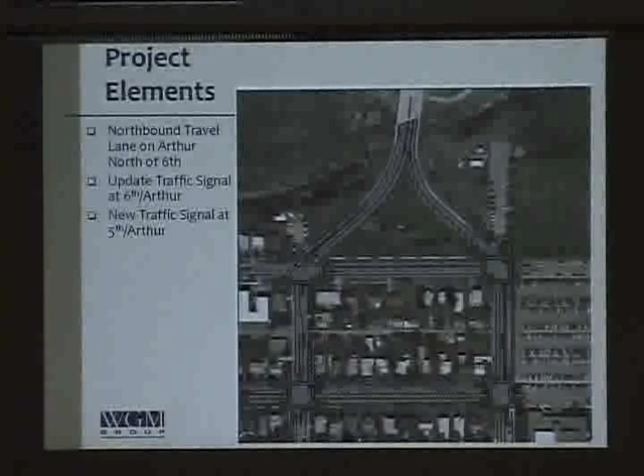I paid attention to our plans for this area over 3 decades anyway. And in the past, MDT has been, I felt, quite invested in the psychology of traffic headed south over Madison Street Bridge, that it is a 4-lane divided limited access highway with huge big green interstate signs overhead, and that's why it's okay to drive 45 miles an hour over the bridge. And then people have to really slow down and start thinking a bit differently when they get over the hump and see what's ahead of them.

Is MDT loosening up a bit on this little mini interstate in the middle of Missoula? I mean, is it willing to make some changes, perhaps in the future, when we rethink this whole thing? I mean, they've been pretty locked into a quarter mile of interstate in downtown Missoula for a while.

I guess, did everybody hear the question? I didn't hear anybody shake their head, so I'll assume so. I guess the best response that I can offer you is MDT has been a very helpful partner in putting this project together. I can't speak to their mindset. I don't believe that MDT has a single mindset. The district and Helena often have different ideas on things. And there's many good people in Helena that I work with on traffic issues, and they don't always have the same solution in mind to different problems. So I don't think there's any one mindset that MDT has. But they have been very helpful on this project in reviewing what we've proposed, offering constructive feedback, and even being willing to work with us to change this system.

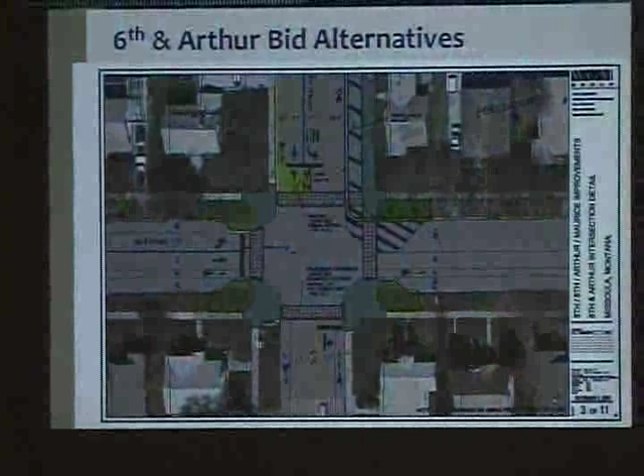Look at the features here that are not standard MDT features. The bike box, the green bike boxes, allow the bikes ahead of the cars physically, both visually and functionally. That's innovative and receptive from the Department of Transportation. They've responded to the city and university's request for that innovation on their highway, and they've tentatively, preliminarily agreed to that design innovation. It's used successfully elsewhere; it's not new, but I'm pointing to it as evidence of MDT's partnership.

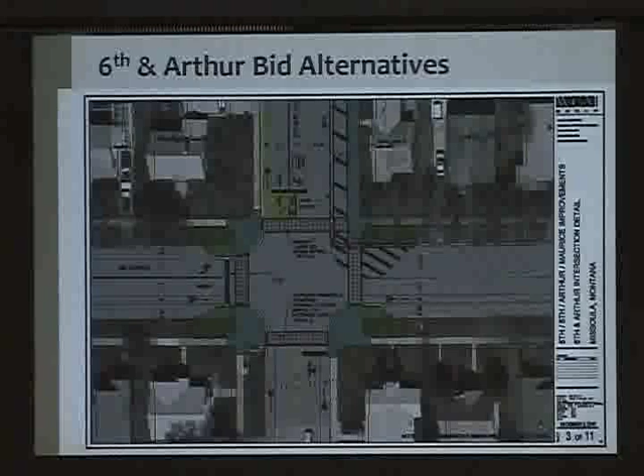The other thing is the green paint, being able to highlight vulnerable crossover areas and exposed areas for bicycles. That's something we really want to do, to prevent and highlight those conflict areas, and they've agreed to consider the green paint as well. Those are just two examples of accommodations the city working with MDT may accomplish if we can get through this project.

You've been waiting a long time to ask your question. Can you talk a little bit about street and intersection closures anticipated during construction? I'm going to let Greg field that one since he did such a good job on the radio the other day. The question was, could we speak to street and/or lane or intersection closures during construction?

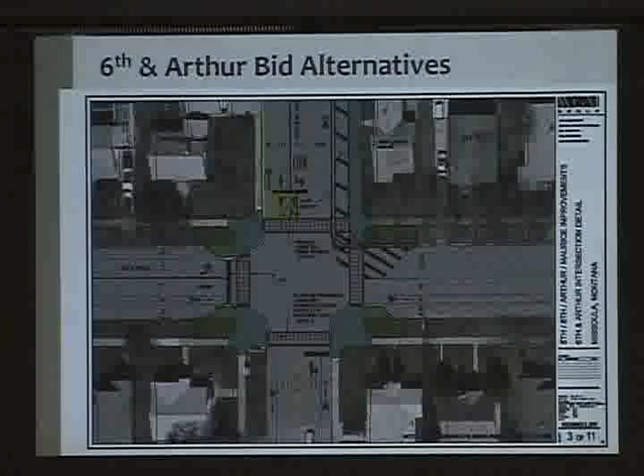There will be street and lane closures. We need to get a contractor on board first. If there are detours that work nicely, we can consider those. We would always advocate for lane closures, not street closures.

As we did downtown on Higgins, working on four corners close to each other, it doesn't take much for equipment working on one corner to intrude into the lane. It became evident that we wanted to close down one side at a time if we can. We don't have a detour plan developed yet, but there are many ways we can get there.

I can see a high impact on bus movement there. Yeah, and we'll work with you. Those meetings you had for the downtown change every two weeks, right? Those were really helpful to get ideas across. Could that be continued? Yes, I think we could commit to having construction meetings bi-weekly with the public or something like that.